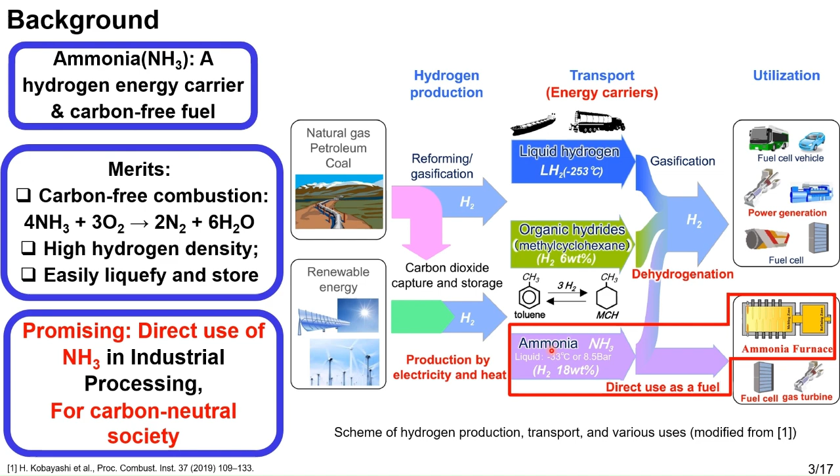Generally, turbulent jet diffusion flames are used in industrial furnaces for the melting of raw materials. There are some issues if you want to directly use ammonia and air as a jet diffusion flame. The flame is very hard to stabilize. Further, ammonia combustion features a lower flame temperature and lower radiation heat transfer than hydrocarbon fuels. However, industrial furnaces require particularly high temperatures.

Therefore, the utilization of oxygen-enriched combustion is regarded as an effective approach to enhance ammonia combustion without changing the chemistry. Besides, even though oxygen-enriched combustion can achieve high temperature and high flame stabilization performance, it may also increase the production of NOx. Therefore, the objective of this study is to clarify the product gas emission characteristics of ammonia/oxygen/nitrogen non-premixed turbulent jet flames in oxygen-enriched conditions.

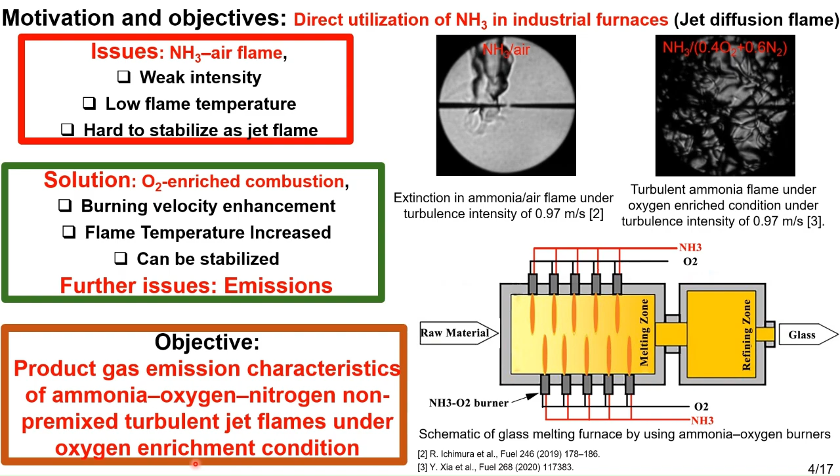Therefore, based on the understanding of the objective, I would like to talk about the experimental methodology. The top left figure demonstrates the experimental setup used for the current work. The burner consists of a fuel nozzle and a coaxial oxidizer nozzle. Mass flow meters were used to monitor the flow rates of the fuel and oxidizer. In the oxidizer, pure oxygen and pure nitrogen were well premixed before being injected into the oxidizer nozzle. The oxygen mole fraction was defined by using this equation.

Additionally, in actual industrial furnaces, combusted gas such as nitrogen and water vapor circulates and affects the flame and emission characteristics. Therefore, nitrogen co-flow was used to simulate this kind of scenario, and the nitrogen co-flow velocity was constant at 0.4 meters per second. A non-premixed turbulent jet diffusion flame was developed in a liner to prevent external disturbance. Currently, we use the insulation wall as a liner.

A Fourier transform infrared gas analyzer combined with oxygen and nitrogen analyzers was used to analyze the product gas from the flame. The exhaust gas temperature was measured at the top center of the liner. Three heat output conditions, including 5 kW, 7.5 kW, and 10 kW flames, were used in the current work. All flames are turbulent jet diffusion flames.

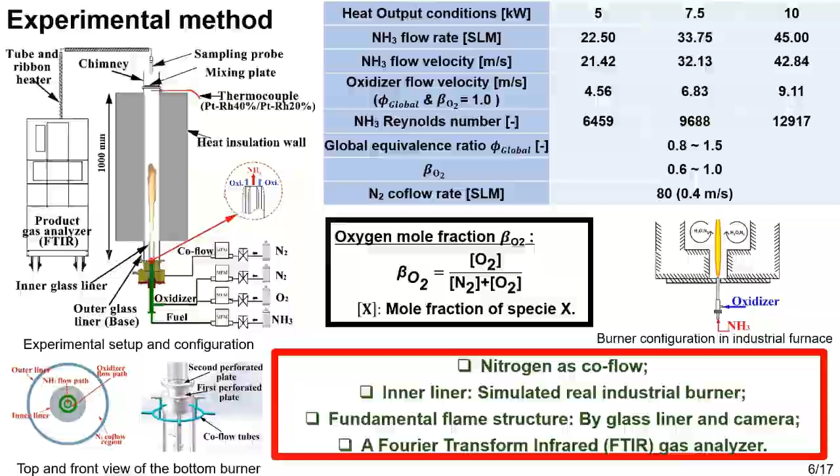Based on the ammonia jet Reynolds number, the global equivalence ratio was changed from 0.8 to 1.5 for the clarification of the emission characteristics. The oxygen concentration was varied from 0.6 to 1.0 for the investigation of oxygen concentration effects. Next, based on the understanding of the experimental setup, I would like to share the emission data obtained in ammonia turbulent jet diffusion flames in oxygen-enriched conditions.

First, let me introduce the effect of oxygen concentration on the emission characteristics. As we can see from the left figure, it demonstrates the effect of oxygen concentration on the emission and the exhaust gas temperature for 7.5 kilowatt flames. As we can see from the top side figure, demonstrated as figure A, it shows the emission of NO and ammonia, and also exhaust gas temperature.

The solid line indicates the emission of NO, the dotted line indicates the emission of ammonia. The black line indicates the emission at the oxygen concentration of 1.0. The red line indicates the emission at the oxygen concentration of 0.6. For all oxygen concentration conditions, the trade-off relationship between NO and ammonia was found.

It means the emission from the ammonia turbulent jet diffusion flame exhibits premixed flame characteristics. The optimal equivalence ratio exists to obtain the minimum NO and ammonia for all oxygen concentration conditions. Further, with the increased oxygen concentration from 0.6 to 1.0, the NO increases and ammonia decreases.

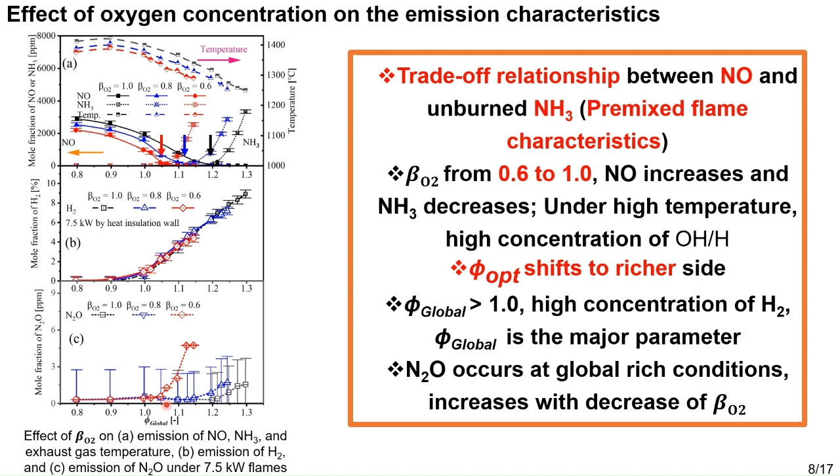Next, I would like to talk about the effect of heat output on emission characteristics. The left side figure demonstrates the effect of heat output power on emission and exhaust gas temperature at oxygen concentration 1.0. Figure A demonstrates the emission of NO and ammonia. The black line indicates the emission at the heat output condition of 10 kW. The red line indicates the emission of 5 kW flames.

Therefore, for all heat output conditions, the trade-off relationship between NO and ammonia was found, the same as with the oxygen concentration effect. Further, from 5 kW to 10 kW flames, the NO increases and the unburned ammonia decreases under the same global equivalence ratio. The top side of this figure shows exhaust gas temperature increases with the increase of heat output. It means more heat can be accumulated under high heat output conditions.

Further, the optimal equivalence ratio was shifted to the rich side with the increase of heat output from 5 kW to 10 kW flames. Figure B demonstrates the emission of hydrogen. Generally, hydrogen is mainly produced on the global fuel-rich side, and it increases with the increase of heat output power.

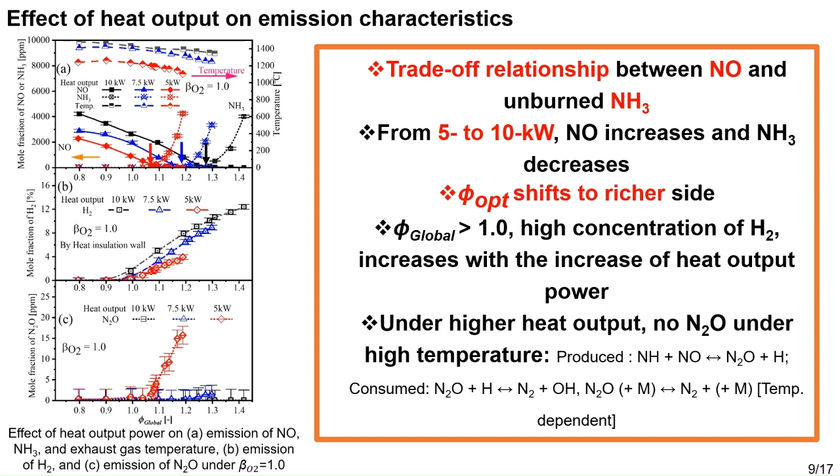Further, we also made some experiments using an uninsulated wall and compared emissions between insulated and uninsulated walls. The left side figure demonstrates the comparison. The black line indicates the emission with the uninsulated wall. The blue line indicates the emission with the insulated wall condition, which I previously explained. As we can see from figure A, by using the insulated wall, the exhaust gas temperature increases by 300 Kelvin. Further, the optimal equivalence ratio was shifted to the richer side by using the insulated wall.

Further, as we can see from figure C, using the insulated wall, there is almost no N2O emission for all conditions. One important thing is the optimal equivalence ratio exists for all conditions, and premixed flame characteristics exist for the ammonia turbulent jet diffusion flame. So why does this phenomenon happen for ammonia turbulent jet diffusion flames? Next, I would like to explain this phenomenon.

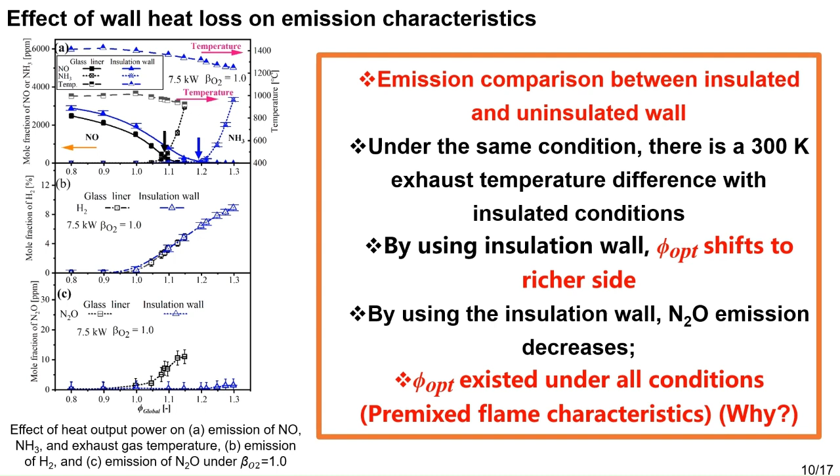To understand the local flame structure and characteristics of the confined non-premixed ammonia turbulent jet diffusion flame, we did counterflow diffusion flame calculations using CHEMKIN. As proposed by Williams and Peters, the local flame structure of a turbulent jet diffusion flame can be treated as a counterflow diffusion flame structure based on the flamelet concept. Therefore, we can obtain the local flame structure of an ammonia turbulent jet diffusion flame using counterflow diffusion flame calculations in CHEMKIN. The basic configuration for the calculation is shown here.

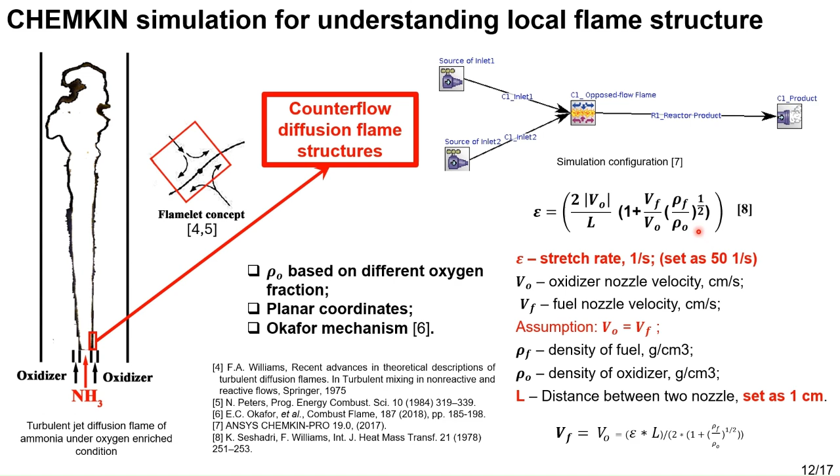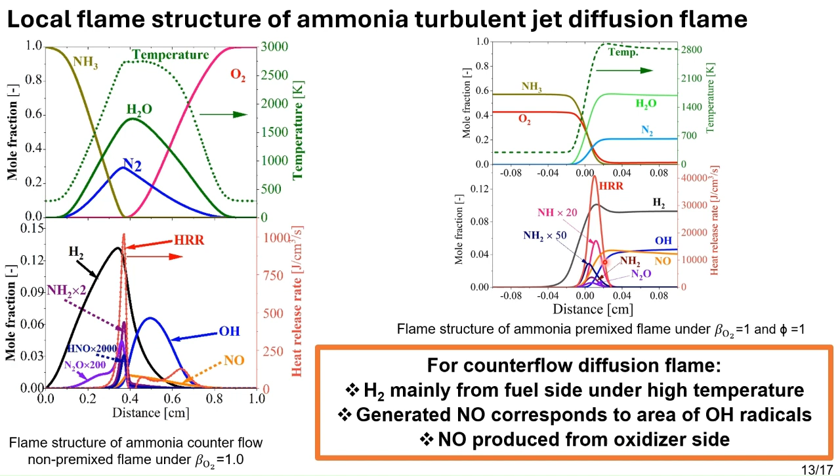In the current non-premixed turbulent jet diffusion flame, it's reasonable to consider that the flame structure near the burner rim is close to the counterflow laminar diffusion flame. However, with an increase in flame height, the fuel and oxidizer were both diluted by the burned gas and coflow nitrogen. Based on this, to understand the full ammonia turbulent jet diffusion flame emission characteristics, further chemical simulations were conducted in terms of nitrogen dilution effects on the fuel and oxidizer using the counterflow diffusion flame configuration.

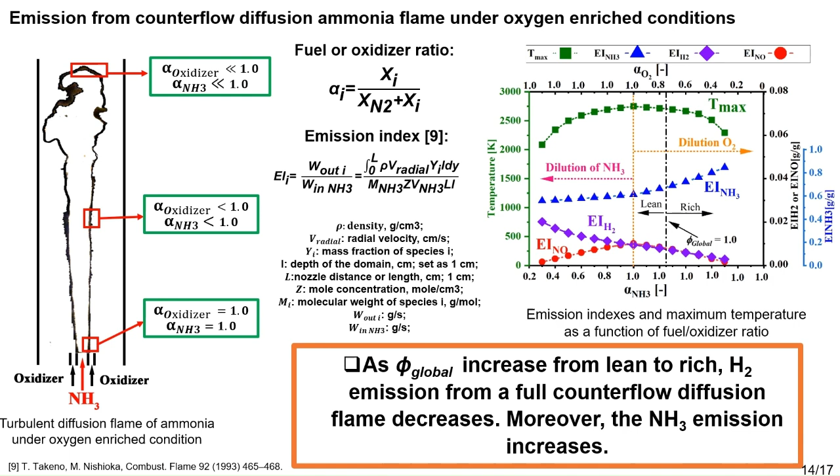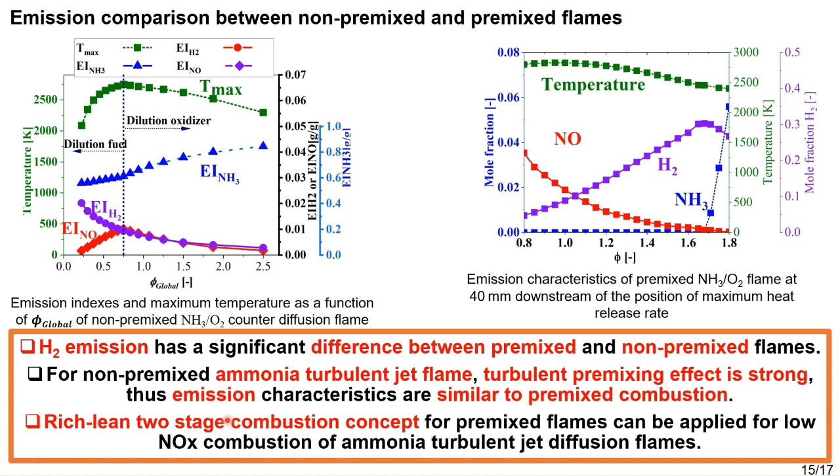It can be considered that for the non-premixed ammonia turbulent jet flame, the turbulent premixing effect is strong. Thus, the emission characteristics are similar to premixed combustion. Therefore, the rich-to-lean two-stage combustion concept for premixed flames can be applied for low NOx combustion of ammonia turbulent jet diffusion flames.

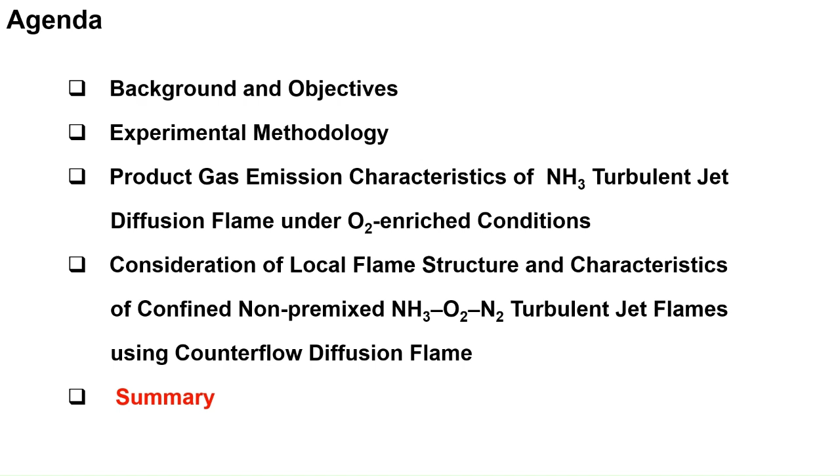Finally, I would like to summarize the main findings from the present research. Through this work, we clarified the emission characteristics of ammonia turbulent jet diffusion flame under various oxygen concentrations and heat output conditions. We also clarified the wall effect on the emission characteristics of ammonia turbulent jet diffusion flame. We first found that the trade-off relationship between NO and unburned ammonia exists in ammonia turbulent jet diffusion flames. Further, the optimal equivalence ratio exists to obtain the minimum emission of NO and unburned ammonia.

We discussed the local counterflow diffusion flame structure and used it for the understanding of the emission characteristics of ammonia turbulent jet diffusion flame.